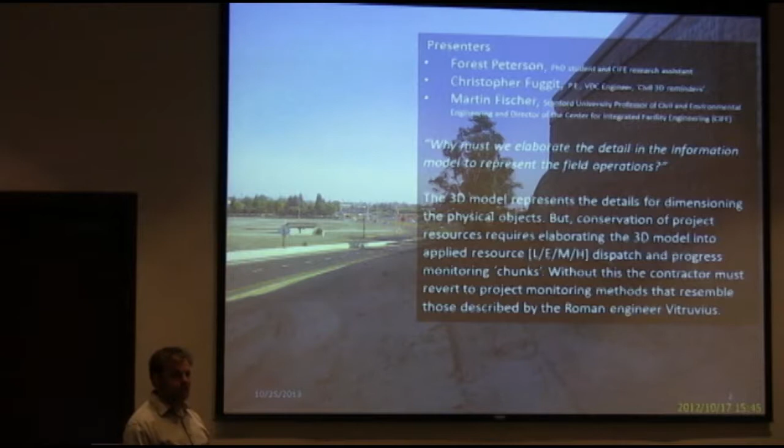From that point, when you go to the construction level, you need to elaborate the model to represent your applied resources—usually labor, equipment, material, haul. This allows you to dispatch and do progress monitoring in small chunks. Otherwise we'd have one line item for the whole project, and I'd say I'm 83% complete. You'd ask, how do you know? I'd say, that's just where we are. So we break it into small pieces and aggregate it up so we can come to an exact point of where we are in the project and what we need to do to finish.

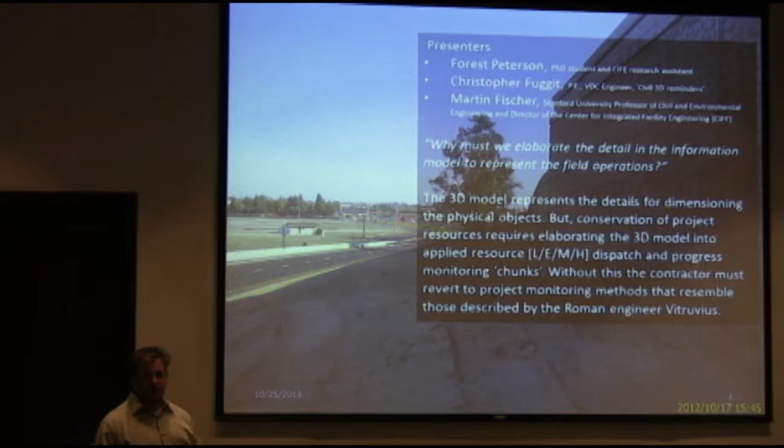Without that method of elaborating project detail... I read a book written by, I presume, a civil engineer named Vitruvius, a Roman engineer who built lots of great things, siege engines included. In his book he also had a chapter on project management, and I was amazed that the project management method he described was no different from the one I was taught to use. So elaboration is, I guess, a big step forward if you can apply it within the civil information modeling system.

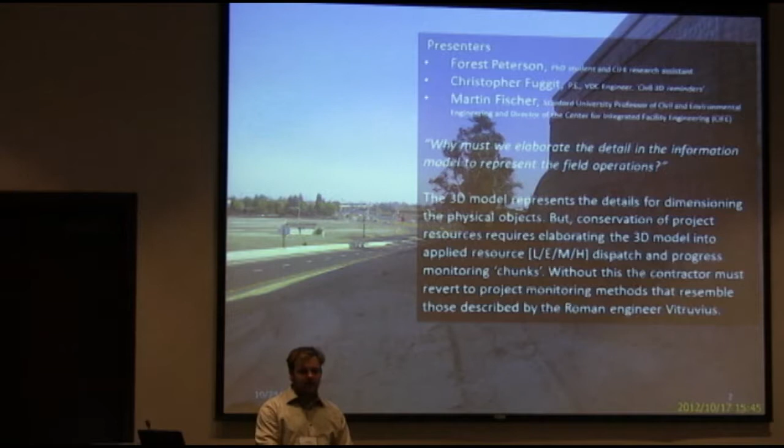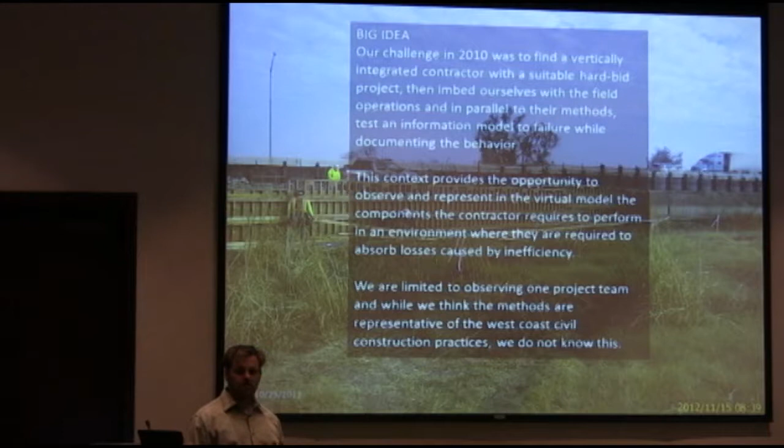So our big idea is: in 2010, we wanted to find a contractor who would allow us to embed ourselves with them. The big fancy word for it is ethnography. We went to live with the natives until we learned to eat their food, and they forgot we were somebody else, and then they just started letting us see everything, how they did it.

So we found a contractor, a vertically integrated contractor, meaning we don't have to deal with subcontractors. It's an all-in-one operation—they own everything from maybe the batch plant all the way down; they don't own the laborers, but basically they have the same guys working there for 20 years, and every project it's the same crew that goes everywhere.

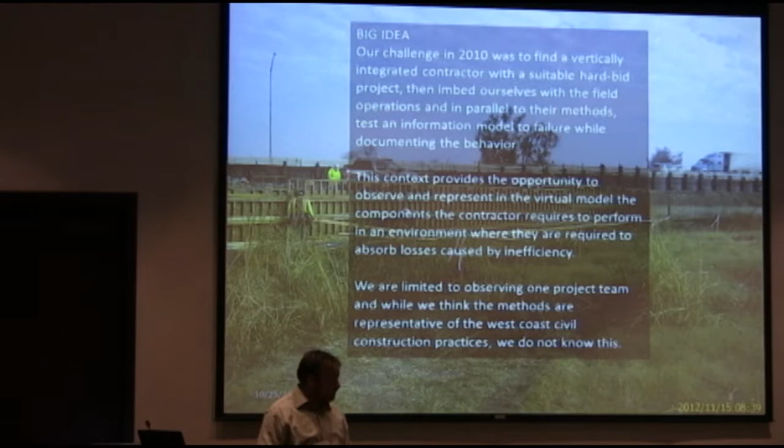And we're looking for these hard bid projects. Hard bid projects were important because we wanted to have an environment where the contractor was forced to eat their mistakes, and it makes them care a little bit more. We didn't want to be in an environment where something goes wrong and you simply negotiate your way out of it and ask for more money.

You know, we all know in highway construction it's not quite so rigid as hard as it seems, but still it's much different than, say, the building industry, where they can basically throw everything to the wind, build something without a schedule, and as things go wrong, well, things just didn't work out.

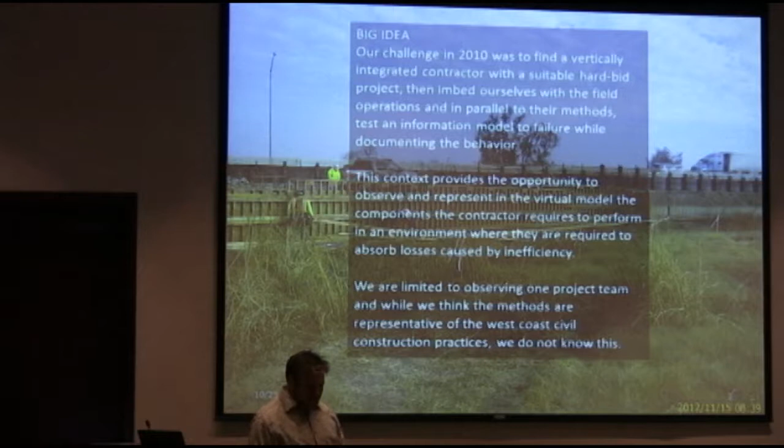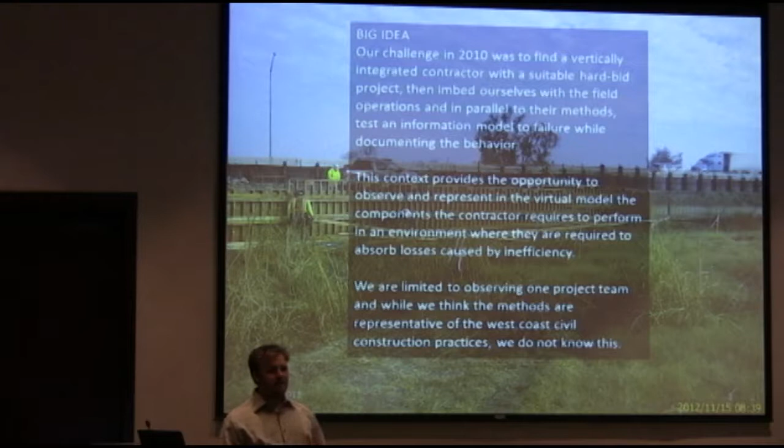And the last thing is just to keep this in perspective: we observed one project, so everything I'm showing you is just for this company in Caltrans District 10, in Merced. I can't say this applies to anything else in the world.

So there's my little disclaimer, but I'm pretty sure it does apply to everything else. So what we're going to talk about: first I'm going to go through what we call the VDC theory, just a refresher, so everybody knows the terms I use and how I think of VDC, since people have different ways of thinking about this. Then we're going to go through what we call action research, where we partnered up with a company, and they became our guide dog once we got out of the academic world and into the real world. We'd be a little clumsy and confused about what's going on, so they kind of showed us around. We had the host project. We'll talk about the VDC pit, a little bit about level of detail, which is elaboration, then the integrated model, and then some suggestions from what we saw, if we had continued this work.

When we started this, we thought things would have been much easier.

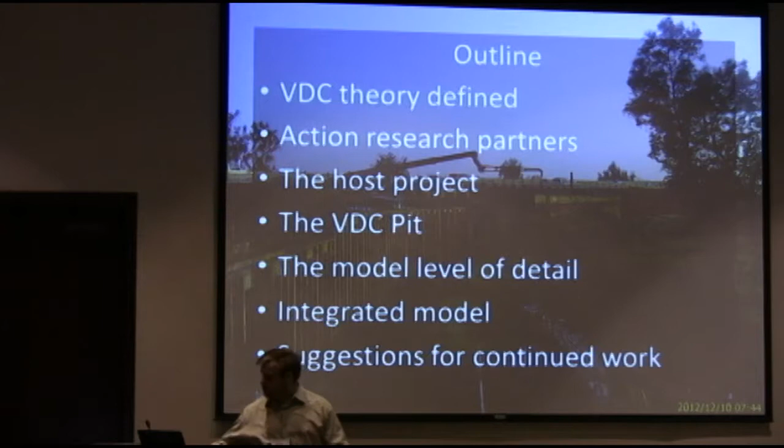So, some background. This is how I see the integrated model. It's basically a Venn diagram with the old project management triangle: scope, time, cost. So when it becomes integrated scope, time, cost, it started making sense to me, because scope is quantity takeoff or bill of materials, time is the schedule, cost is the estimate.

And I looked at, well, what is this in a pure sense? Like, if I just showed up to the project with time and did no project scope and had no cost, what is that? Well, that's MOB. Everybody loves mobilization, it's free money.

So scope, we have permanent, modified, temporary, and removed objects. Pretty much sums up all the categories on a project. And cost is... time is a milestone. Sorry, I got that backwards. Time is milestones. Cost is MOB with no time and scope. That was backwards.

And so where these cross over, you have scope, time, production. Well, that becomes a 4D model simulation. And when you have scope, cost, well, that's unit cost, that's your labor per hour. And time variable cost is usually like rental equipment, haul trucks or cranes and things like that. And where these all merge in the middle is the activity.

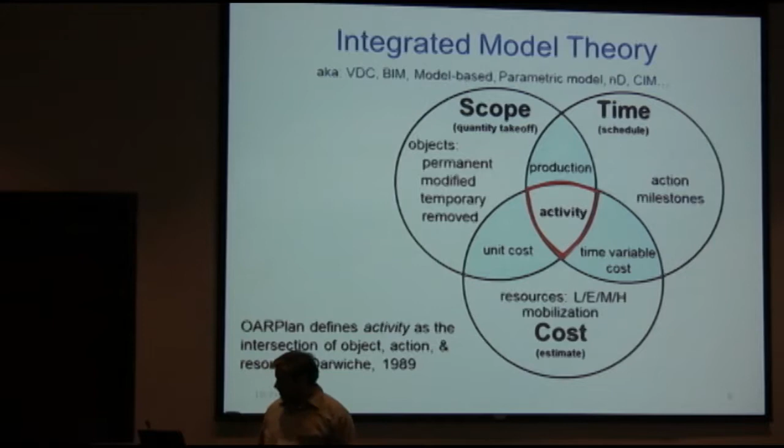So the contractors have to have a way of representing these items, and over the years, no one can tell me quite where these came from. These coding systems have developed. One said, well, we had a code for 10, 20, 30, 40, and that's what we used for our corporate accounting, for our reporting to the IRS or whatever, and the guys in the field tacked on some more levels. He said over the years, it just got longer and longer.

So these codes here, and to help everyone in the overhead here who's not actually on the project understand what they're looking at, it's just been something that's evolved.

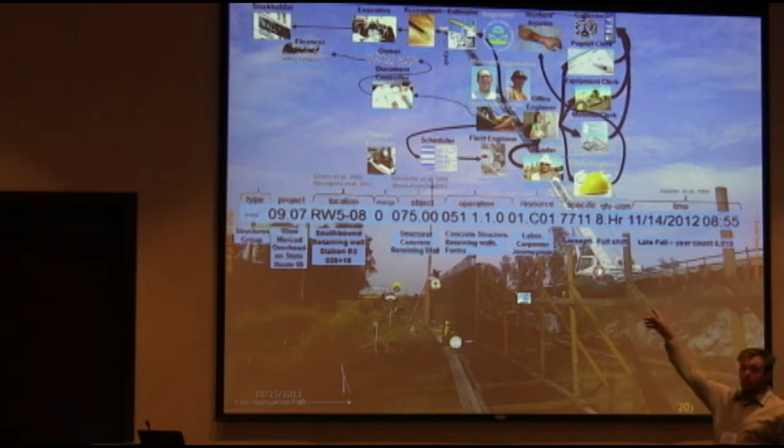And so if I look over here and it says, if I just tell you we have 8 hours, you go, 8 hours of what? And in this case here, you back up and that C01 tells me, well, that's a carpenter journeyman. If it goes C02, it would have been a carpenter apprentice.

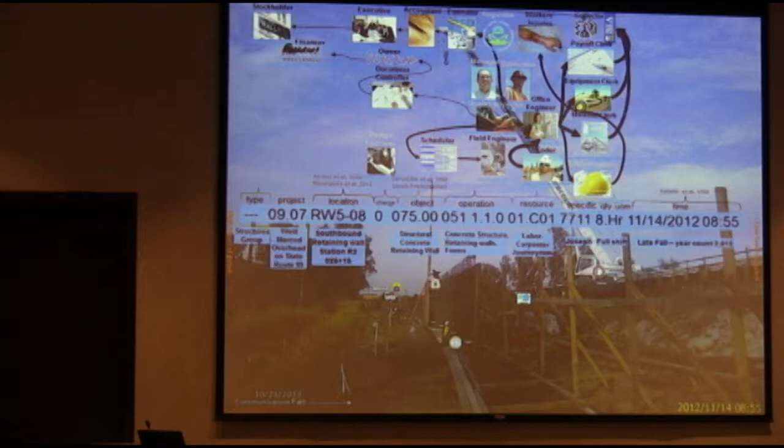So I know that this carpenter up here, he's C01. If I wasn't there and I didn't see this picture, and I just showed you that code, you're supposed to imagine all this happening. You can just see it. And if I show you this without the code, you should be thinking the code. So this is how we tie these things together.

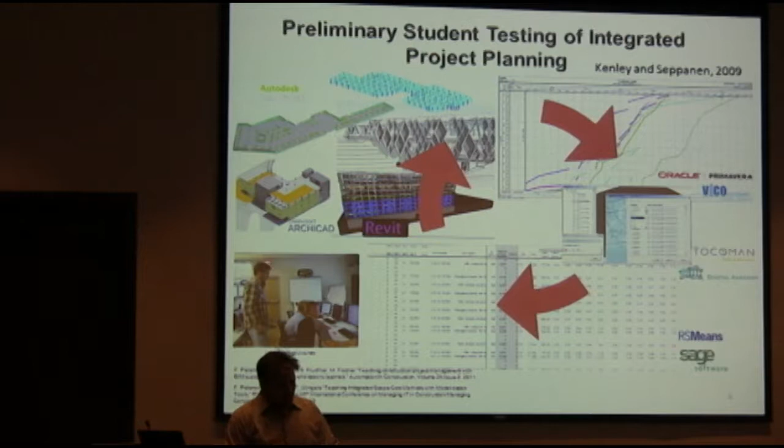In preparation of going out on the project, we tested this for several years with a large number of master students in, I think, 3 or 4 different classes. We wanted to see if this integration system worked. Of course, we were using the building system because it's a little bit further ahead.

So the line of balance schedule has all these funny wiggly lines, but it's basically like a production chart. You imagine the bottom is time, and on the vertical axis, that's location. So as you're moving through the locations of the project, you're running through time, and you can see the production rates, because if you're moving through the locations faster, the slope of your curve will be steeper.

So we then used middleware. There's lots of different types of middleware. This one was a company from Finland that built this really nice middleware package, and that allowed us to move our quantities into this VICO and out into, say, a spreadsheet or some other type of more advanced estimating software. In this case, we have Sage. It could have been MC squared or something.

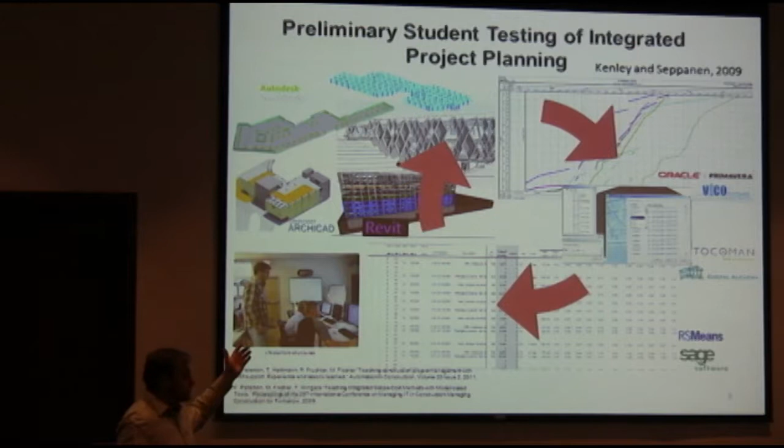And then from there, the students say, hey, that's not the cost we want. Some of these were integrated teams with an architect and a cost manager. They say, okay, well, we need to change this project to have lower costs, and everything. So all this worked fine. We published papers on it, and we were completely confident we were ready to take this out into a heavy construction project, and we're so confident we'll go to a project and actually implement this.

So we looked for a partner. Out in the construction project, the standard is once you have a baseline schedule, of course, in the first week of the project, the schedule is no longer any good. So you have a replanning method.

In the building industry, sometimes they try to have one schedule and hold everyone to it throughout. But in the heavy industry, I've noticed we usually just make a new schedule every month or every week, whatever's needed. So you have your scope that you're building, your production, your schedule, your field crews.

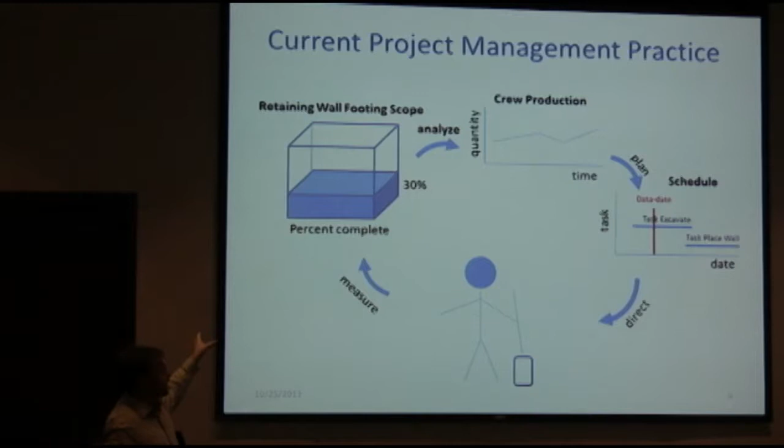So you go through, you analyze, create your production plan, direct the field crews to go do this, they do it, you measure what they did, you update your bill of materials with what's been completed. From that, you can figure out your production rates. Presumably, though no one actually does this, you then reforecast your schedule and redirect the field crews, completing the cycle.

Okay, so here's our action research partner. This is RGW Construction. They don't particularly understand what BIM is or any kind of modeling. They're the kind of guys who get their paper-based plans in PDF, take AGTEK, review it in AGTEK, and create in HeavyBid their estimate. That's just what they do.

But they've been participating in research for quite a few years with Professor Tatum. Professor Tatum has published numerous papers on this company, saying this is an innovative organization. If you want to try something new, this is the type of organization you need to go to.

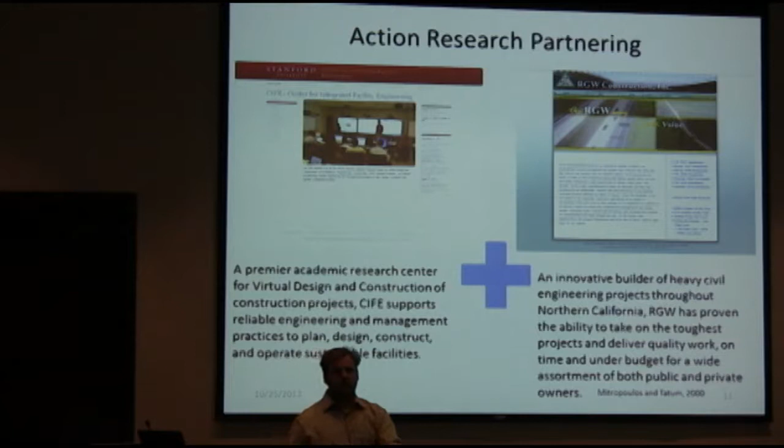They will be accepting. So we say, okay, let's go talk with RGW. RGW says, that sounds fine. We're happy to help you with your research. We can't put this out live on a project without it being tested. You know, they throttled us a little bit and said, let's do it in parallel. We'll do it our way. You can sit there and you do it your way, and we'll see how this does. So this is where we start from.

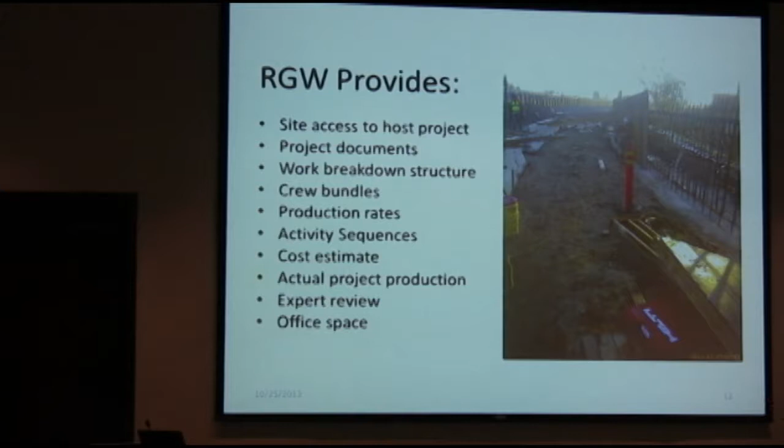So RGW, they give us site access, project documents, their work breakdown structure, another word for that big fancy coding system. They give us their crews, we get their production rates, their activity sequences, they give us the cost estimate, actual project production, their expert review, and of course office space on the project. So this was a very big deal for RGW. I mean, by the time we were done, the regional manager was sweating a little bit because he had just given me all of their company information they use for bidding. And so this was not easy to obtain from a company.

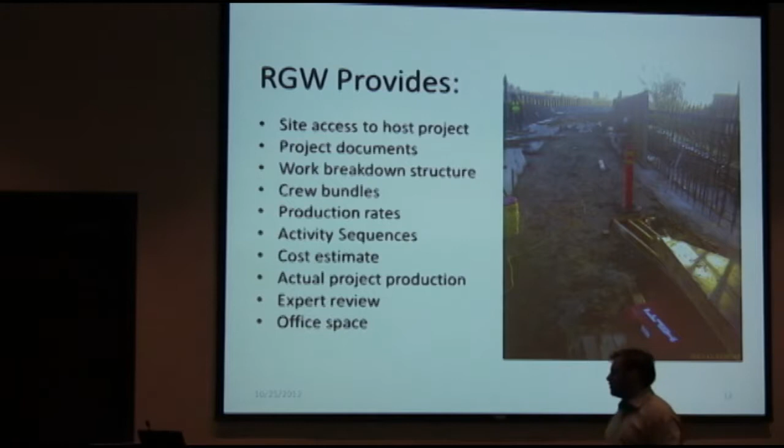And so CIFE, we're the partners, we provide a research assistant. We have software licenses from all our partner companies. And we have the university resources of computing and professors who we can go talk to when things don't work out.

So the project we went to is the Merced State Route 99. This is a District 10 project. It was a hard bid project. And it's a $34 million, somewhere I saw it had a 33% contingency in it. I'm not sure if that was true or not, but I suppose that means they planned on this being a fairly difficult project. I heard later on they were able to pull that money back out.

And this is, I guess this is being done for the high-speed rail, which is supposed to pass underneath this bridge, and you couldn't fit double tracks. And so they're doing sister and cousin projects of this all up and down 99. On the other side of Merced, you take this project, you flip it around, and it's the exact same project on the south side of town where the freeway crosses back over the tracks.

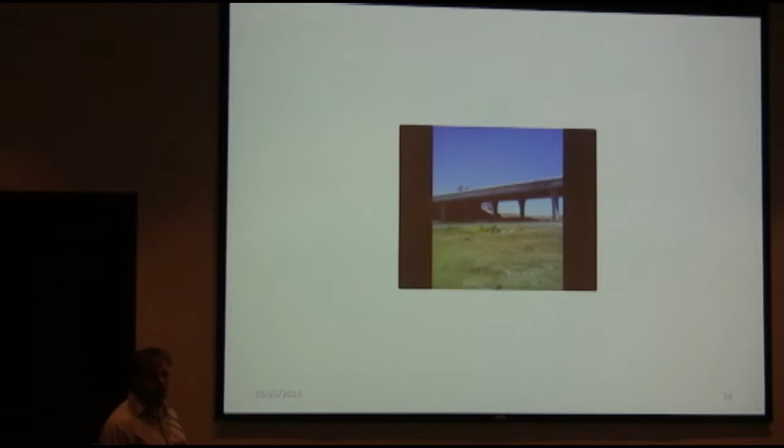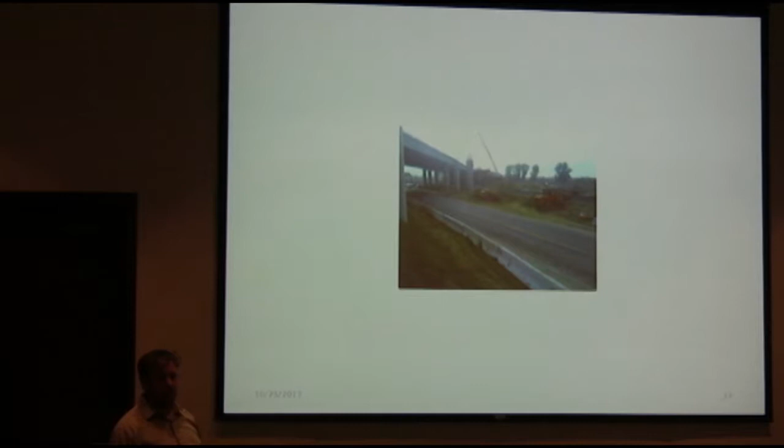So you get an idea of the project. This was just taken with a cell phone. General highway project. And this is after, this is phase 3. You can see the abutments there being excavated. And then same thing here. They have a loader, which is backfilling the footings for the bents. I thought it was interesting here that they were using a loader to backfill. You know, what's the cycle time on that? It was like 2 minutes. But for whatever reason, that morning, on that day, that was just the way that they were doing it.

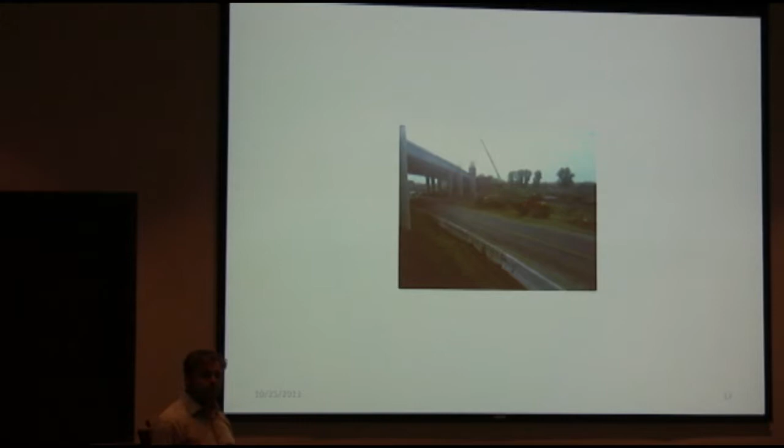So when we got to the office, the first thing was, okay, let's see how they're doing things right now, so we can have a kind of a scientific comparison. So this is what we found. They have the PDF plans printed out. They had the bridge deck, topography rolled out. I think there's a cost estimate somewhere, things on the wall, highlighters, a little calculator, triangular ruler.

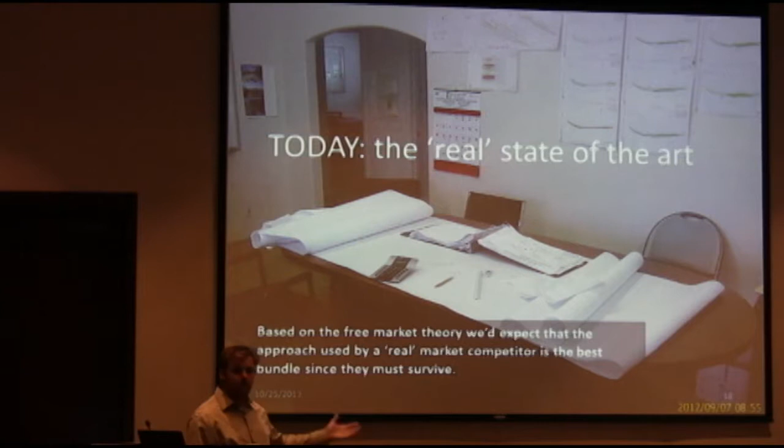You know, if I went back to Vitruvius in the Roman days, I might actually find these exact same items, with the exception of the calculator. You might have an abacus. I think they had paper and they drew in perspective back then. So based on the free market theory, you know, we all know this. Well, these guys are real.

I think the recent economic events. Somebody like Kiewit does it very well. Yes. But for their niche, these guys might be out of business next year, we don't know. But right now they're in business. So we went out in the field, and they have a gap.

We noticed that when we left the office with all the papers and we went out to the field, there's a very different world. If I ask anyone in the field, well, what about the plans? They say, well, they tell me what to do over the radio, their survey over here. There is a very definite gap between the project planning side of things and the field side of things. But these are the key players, these are people actually doing the work.

And I asked the carpenter foreman, he's doing his time cards, I asked him about these codes, and he's explaining these codes to me. He's getting on the radio, someone's telling him what code to use and where to put his hours. And he says, well, you think that I'm filling out all this information, that this is going into the loop where they replan what I'm going to do next week, and even more than that, this is going to go into the plan for the next project.

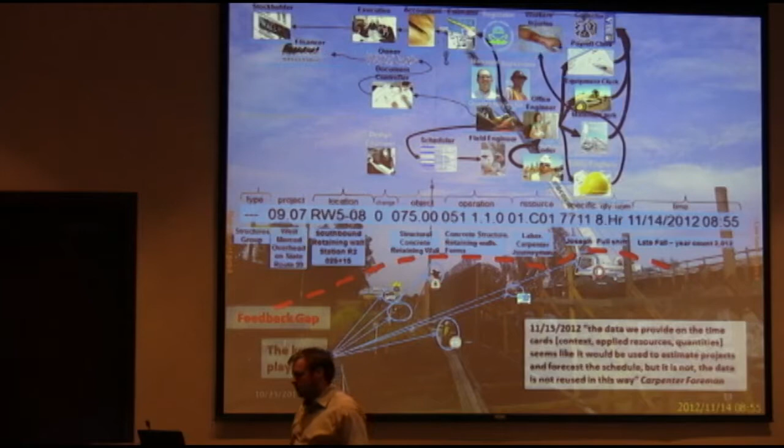But he says, I've been here for 30 years, and I know that's not what happens. This paper goes into a file cabinet, and nobody ever looks at it after they do the billings. And maybe the engineer crosses his desk and he uses it for the monthly billing. So there's this gap that we found. So next is what we brought to the project.

So this was our supercomputer. We built it for this project specifically, took all the most expensive components and brought them all together and tried to build a computer that was dedicated just to sim. And the last addition that allowed it to work was we added a 14-inch shop fan to it, because we found that if we cooled the computer enough, it finally started working. So we realized we're on the edge of the technology here. Today, presumably, the computers would work better.

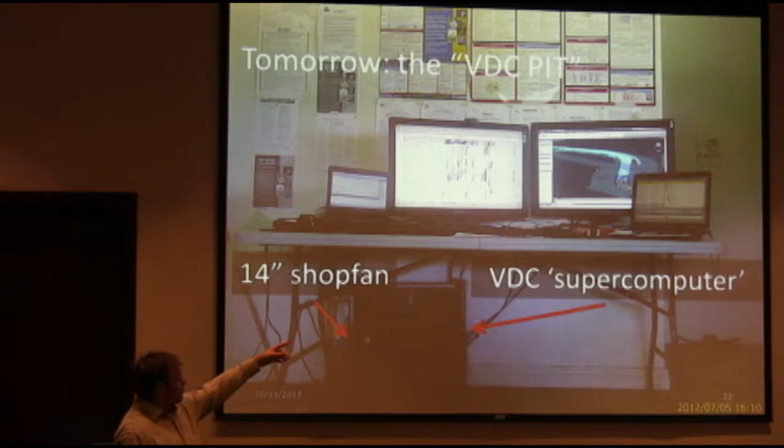And we have an old laptop that we run our older software on. We had a newer laptop just for screen space, and we had the big monitors here. Now we oversized the monitors because we wanted to use a grassroots approach here. We wanted to pull the contractor into what we were doing. And we wanted, as they were walking by, to see over our shoulders, what's this and what's that? So the monitors didn't need to be that big.

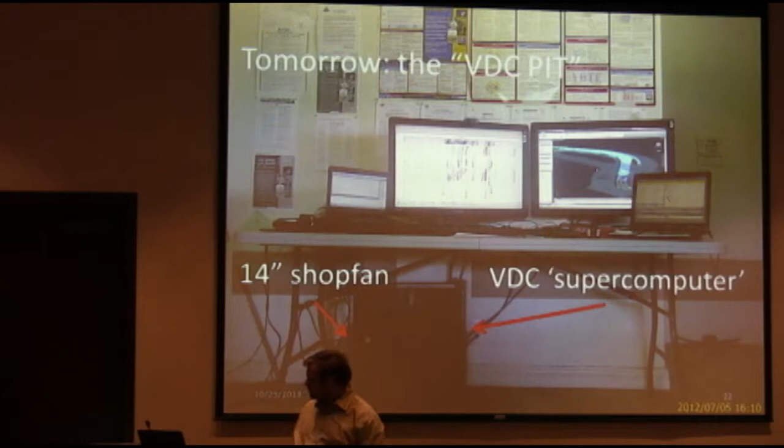And we did the site walk. We had a computer, we walked around the site, and we tried to bridge that gap a little bit, where we were bringing the plans out to the field. I could walk up to a superintendent and say, hey, look at this 4D simulation. Here's my schedule. Does this make sense?

And they would say, oh, no, that's not that way. We've changed the plan. Or they'd say, oh, that's interesting. We are bringing in 3 new crews next week. Or they'd say, I hadn't thought about it yet. This is Monday. That's next Monday.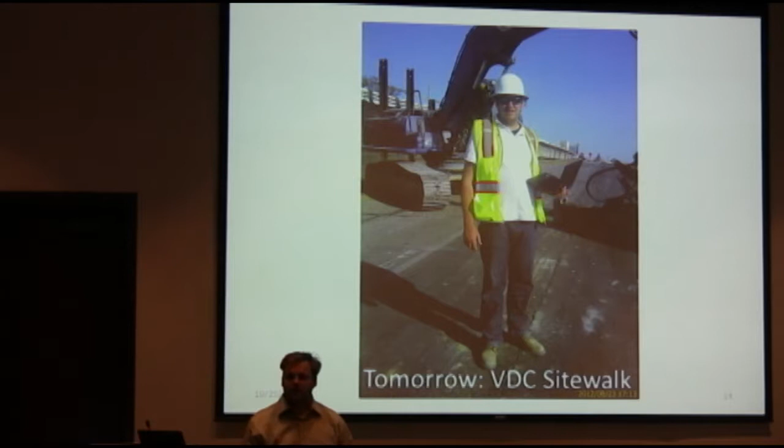So the model level of detail. Okay, so let's look at just the retaining wall on this project, and we'll forget everything else. So in my engineering courses, I learned that there's 3 main modes of failure for a retaining wall. You have the slope failure, the tip failure, and a sliding failure. And so as engineers, this is what we're taught.

This is a retaining wall. It's a solid block, and we treat it as a solid block. It's cantilevered. I push on the top, and I have a lever on the bottom that prevents it from tipping. I put a key on the bottom, it keeps it from sliding. I do soil analysis, soil stabilization, it keeps it from failing.

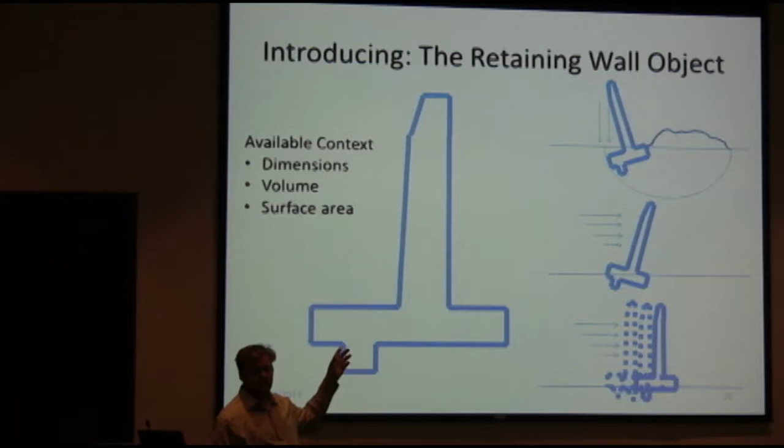But this is how the contractor looks at the retaining wall. So when we show up with software that looks at the wall as a single object, they look at the wall as, I don't have a count here, quite a few objects.

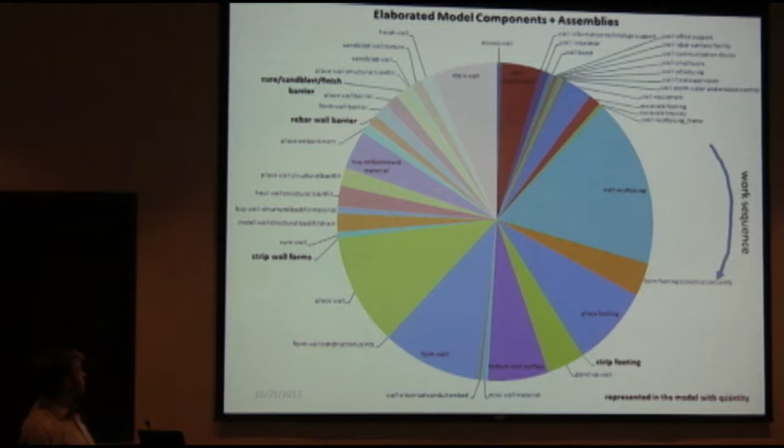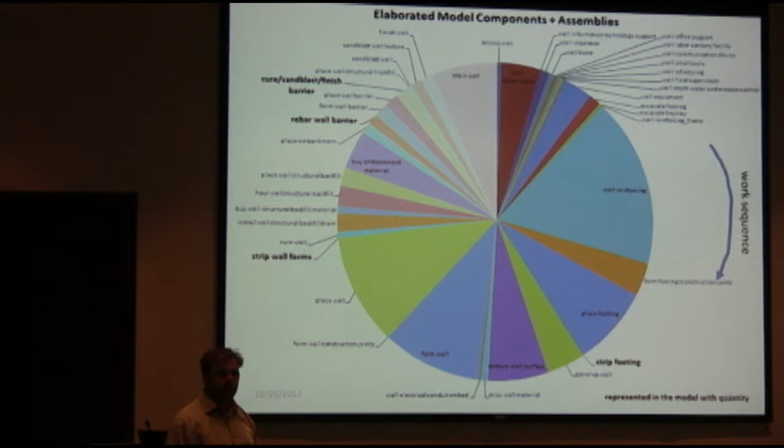So with this here, of course, we don't need all of this represented in the model. Some of these can be done with assemblies. We can reuse some quantities. You know, we don't necessarily need to have a quantity for texture wall separate from the quantity for stain the wall, because the textured wall is what stains, so it's repeated. So I'm going to run through now what each one of these look like.

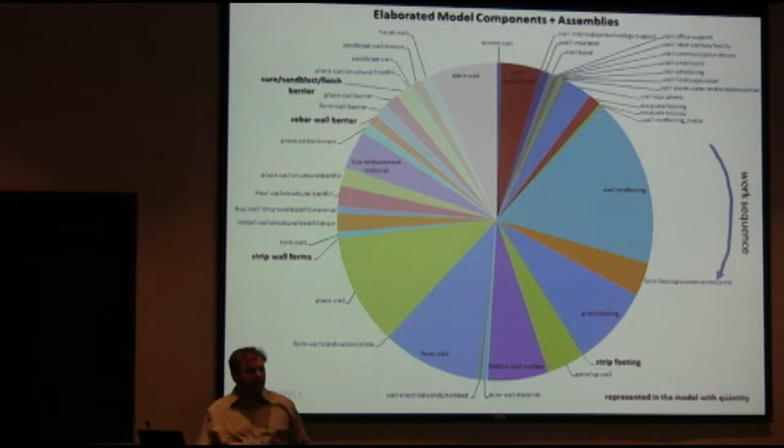So this is the excavate the footing and the keyway and build the rebar template. And then there's an access road. Now the access road isn't necessarily represented in the wall object, but I might want to have it represented just as an equation. When I put a wall object in there, it has an equation that represents that this percentage of the cost is for the wall.

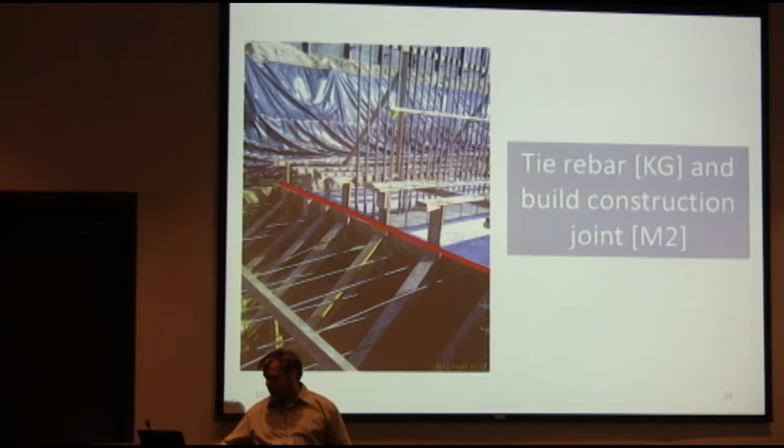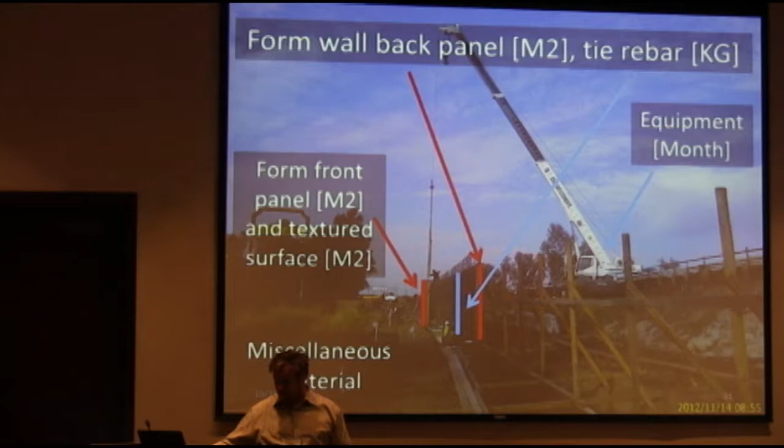We have the tie rebar and build the construction joint. We have the place footing, strip and cure, form wall back panel and tie the rebar, form the front panel and the texture surface and the miscellaneous material. And then we have the equipment, place wall concrete, strip, cure, sandblast, and patch, and sandblast to textured surface.

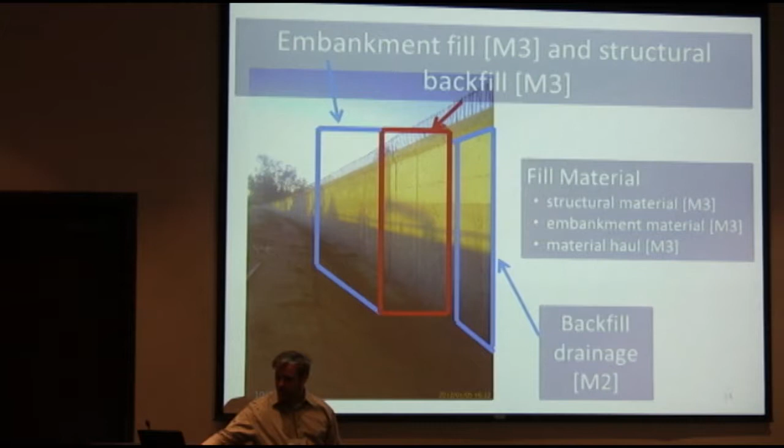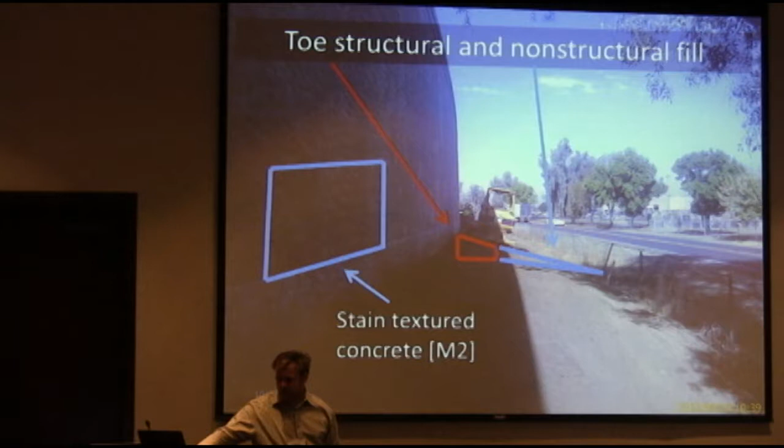We have embankment fill with structural fill and backfill. And then we also have the associated costs with purchasing the fill and hauling the fill. And then there's also the backfill drainage. We have the barrier rebar, the toe structural and non-structural fill, and staining the textured concrete. Form, place, strip, cure, sandblast, the barrier rail.

And then we have the wall overhead, which is assemblies within there. You know, some contractors know that supervision for a retaining wall type activity is going to be 5% of the total cost. And I saw one contractor had broken out all these different items, not every one of them, but they had percentages that they use in their estimate to put overhead on different items. And then they had the stormwater runoff and erosion control, and an electrical conduit happened to be in this wall.

So we needed a wall object in the sim that we were able to grab these quantities from, because our schedule is based on those quantities, the production rates we take from the field that the crews are turning in. We take last month's production to then forecast this month's production. So at this point, I'll turn it over to Christopher and let him go into details on the wall objects.

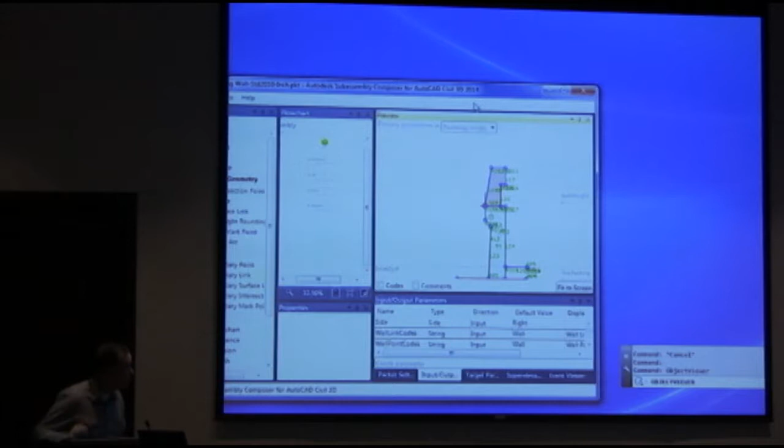All right, so one day out of the blue, I get a call from Forrest, didn't know beforehand, and he's asking me if I could do a retaining wall for him in Civil 3D. So if I open up Civil 3D, it's got some walls in here, somewhere down here. Basic data.

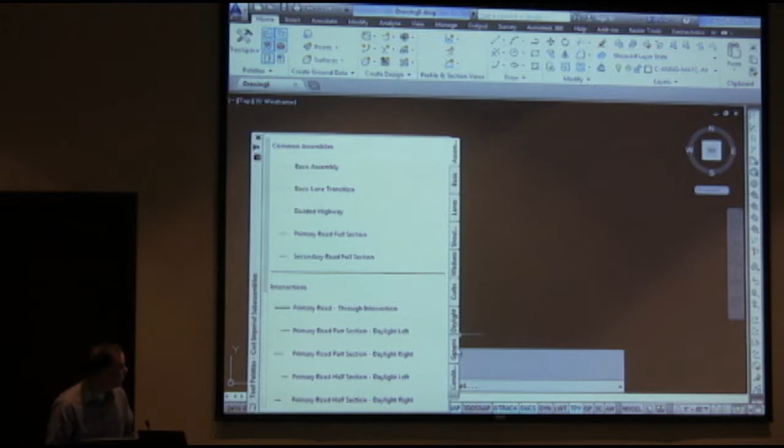Retaining walls. So it's got some retaining walls in here, but none of them are really suitable for construction. I wouldn't use them as construction, and I've done it before and tried to model it, and it doesn't work very well. So Forrest definitely needed some help if he was going to pull that information for those walls out into it. And so when he called me, Autodesk had recently introduced the Subassembly Composer, and so I was pretty sure I could revise it and give him something he could use to do that.

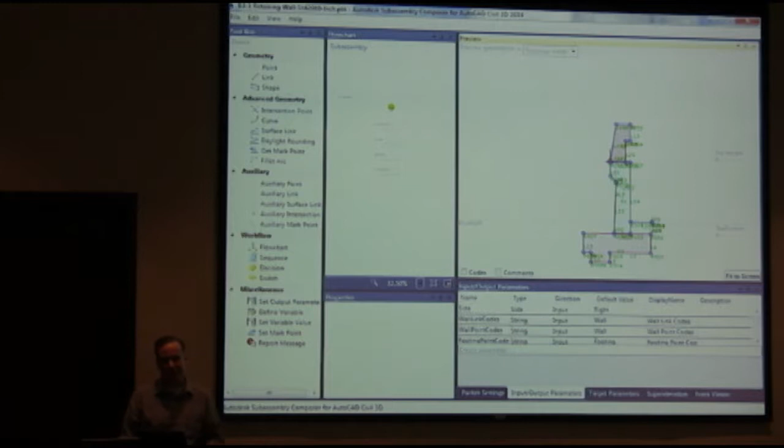And then I asked him how much money he had for it, and he told me he had $0 for me. So I had a decision to make. Do I do it for free, or do I try to barter something with him? And so I decided to barter with him, and so I traded my services to do this for a tour of Stanford University. So I did get something out of it. I just didn't get cold hard cash. And I actually had some time back there. It was around 2009. Economy was down. Not a lot of people were calling me. And so I had some time, so I figured I'd help them out.

And so I was able to break it up in Subassembly Composer. It's got pretty good tools to build the geometry using points, links, and shapes. And so I can build that wall that he needs and assign the codes to it.

So over here is the basic shape of the retaining wall. And so I was able to provide him a link point. So if the roadway is up on the left-hand side, he could use it for this side. And he could come down here and change the attachment point from right to left. I believe if I change it to the other side, it updates it, and now the tie points go the opposite way.

And he's also able to turn on and off the barrier up on top. I change that, the top of the barrier goes away for the roadway, and so he's able to customize it and actually get the thing he wants.

So before Subassembly Composer, it was a really long, drawn-out process, creating your own custom subassemblies. You had to go in .NET and code it, and it took probably about 3 times as long to code something like this in .NET using Visual Studio than it does to use Subassembly Composer. So for this one, it probably took me about 16 hours to put everything together. There was some learning time in that because Subassembly Composer at the time was new. So I could probably do this in like 12 hours now.

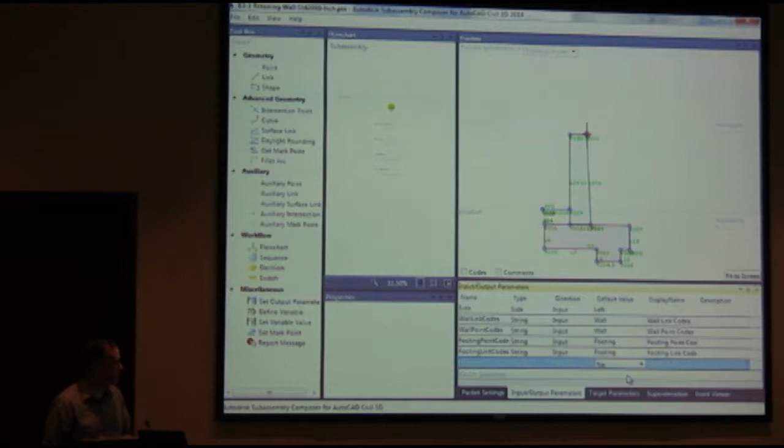So I'm able to set targets, and the targets can move. And so if I turn existing surface, it'll update, and so now my daylight for the top of the wall adjusts to it. So we could either put it in as a profile or just use a target for a surface. And so he's able to build his model using the actual values shown on the plans. So here I have the top of footing profile that you could set and get the actual location where it should be based on the plans.

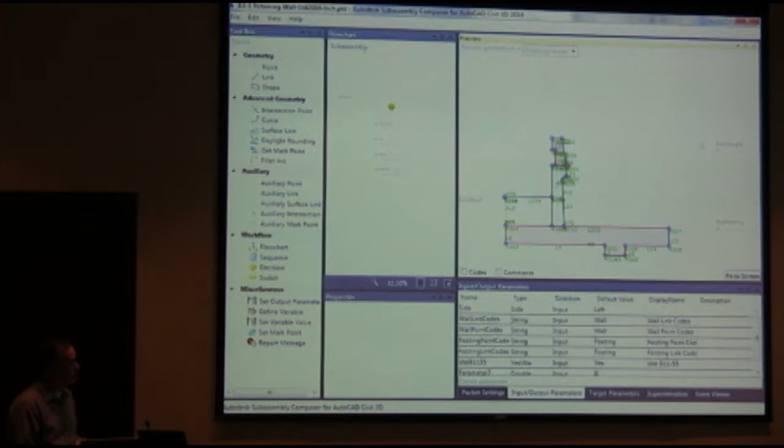And then you could also do the top of wall profile as well, and move it up. And so if we look at the standard plan, dimensions change based on the height of the wall. So as I adjusted the top of wall higher, the bottom of my footing got bigger. And so I was able to help him process this information based on the height, so he doesn't need to think about what the height is. It'll automatically do the footing for him, which is good and bad.

So it's good that I've automated the process, but it's bad because Caltrans's engineers or a consultant to Caltrans who did this really doesn't have those tools available to them, potentially. And so they've gone through and they've set their profile and their wall height, but my wall height may not actually match what he has.

So it's just something that you need to look at to make sure that if you're going to model it in Subassembly Composer and set your heights, that you double check that that's what the designer actually wanted, and that they are actually using the standard plans, because sometimes the time crunch happens and we forget to go back and change that footing and width later on. And so our plans might not reflect the actual design requirements based on just the standard plan.

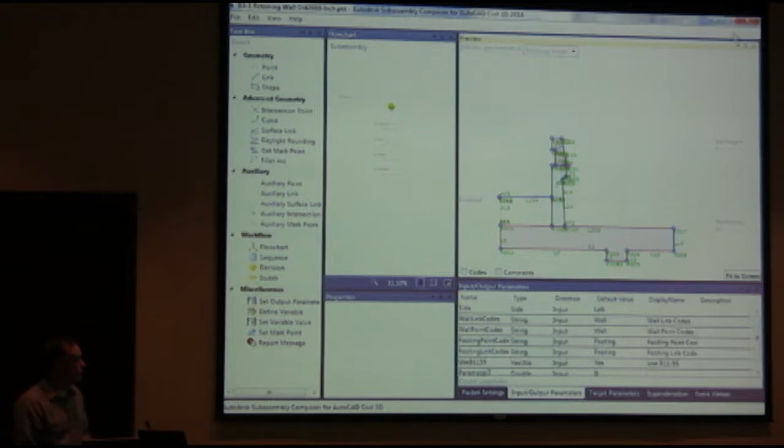So I created that for him, and then from that, he was able to create a 3D model, and that's one of his models. So this is the daylight line as the profile goes up. So it looks like the designer could have cut some wall height off there. If they were using 3D, they'd have been able to recognize that and adjust it and get a little more economical design.

If you look at it, one thing I don't like about Civil 3D and using corridors for design for walls, and I can't really find a good angle for this, is that the steps aren't nice and clean, so I'm not really getting great quantities out of it. Or if I do want great quantities off it to get that nice vertical face, I'm spending a lot of time trying to figure it out and put those in there.

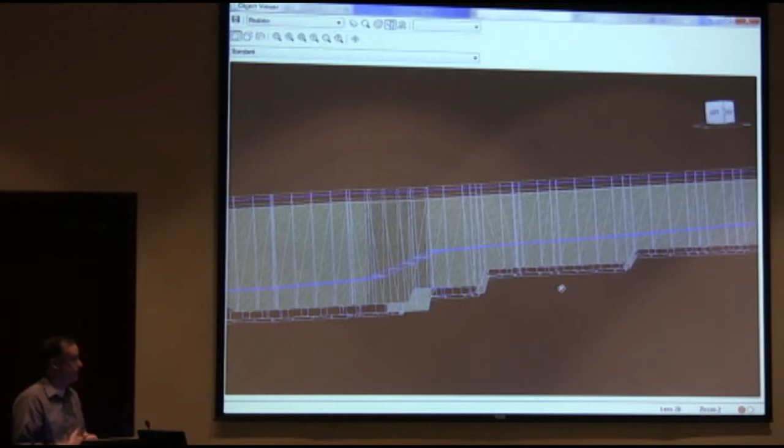Then we get down to, is it really worth that effort and time? And a lot of times it isn't. So, really, the contractor could have built it without this 3D model, which they probably did anyway. And so, that's it. I got the barrier on top, and then you can see the footing adjust and the steps and stuff. But you got a nice visual cue, a visual picture of it, and plus you're able to get the quantities from it.

Are you using a target profile for the bottom of the wall? Yes. And then the top of the profile, then I'm taking the math, subtracting, and then getting the footing width based on the Caltrans standard plan. But if you use the standard out of the box ones in Civil 3D, they don't really work very well. I'm not quite sure what world they live in, but it's not one that...

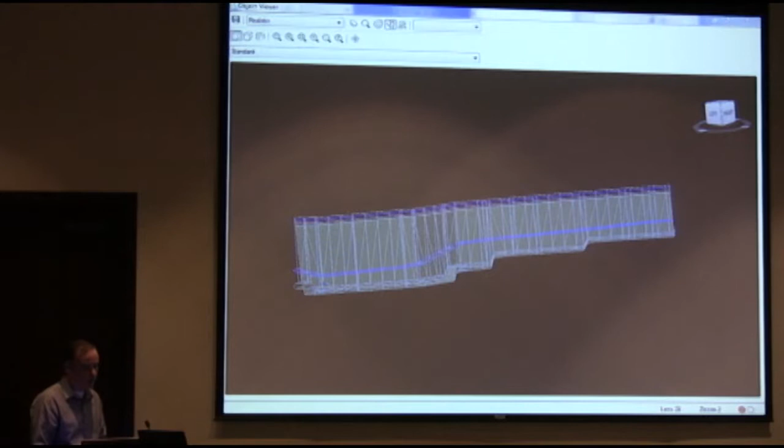But there was some additional information that I probably wanted to show on the wall. But like I said, I was doing it for free. And so I actually got busy doing something other than this project. And so if I was doing it as paid work, I probably would have gone in and created the extra links so you could do the quantities for the backfill, the wall backfill, the gravel that goes there, the pipe,

put in some daylights over here so it extends out from the bottom of the footing and goes up 2-to-1 or 1-to-1 to the daylights. So there's a lot of improvements that I could have done to get better accuracy. Add an option for maybe that access road that Forrest was talking about in his image. And I think that's all I have to talk about.

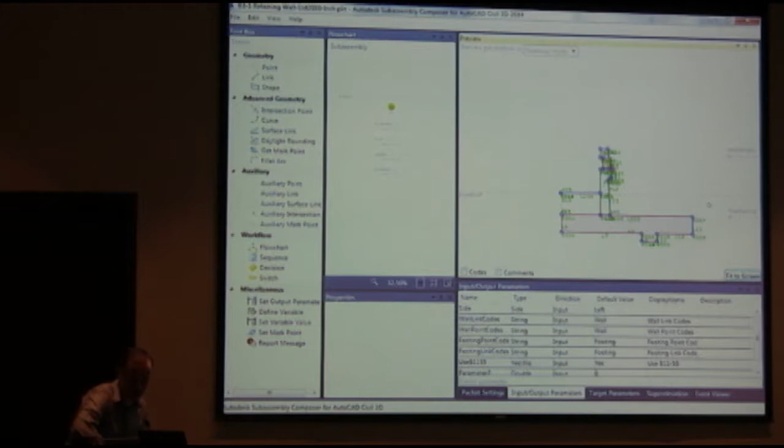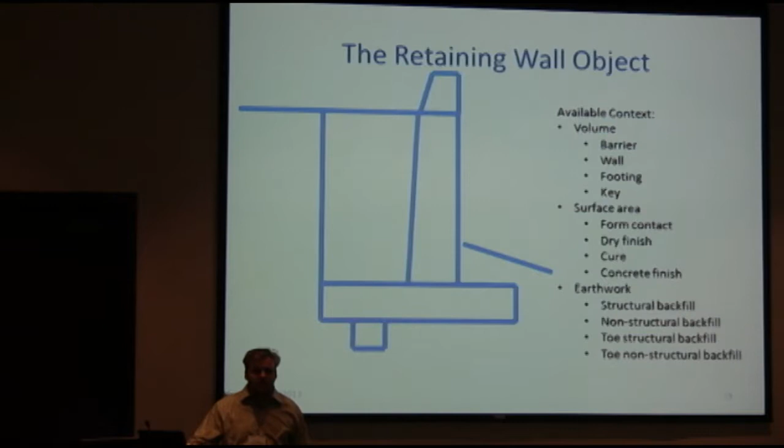So without that object, the experiment was done. We would pack up and go home. There was nothing more to do because we couldn't represent the retaining walls. Maybe I could have drawn a line and just done an average massing per foot or something like that, but it was impossible to model. So these are the standards that were embodied in the wall.

And so when we put it all together, these are these beautiful walls that as the walls curve along the roadway and change elevation, the footings change, the earthworks that go along with it are all put out there. And for what we were doing at this early stage in SIM, the quantities were just incredibly accurate. And so we were able to have very good numbers that we then rolled into the schedule with the quantities and with the contractor's production rates and their expected crewing and scheduling.

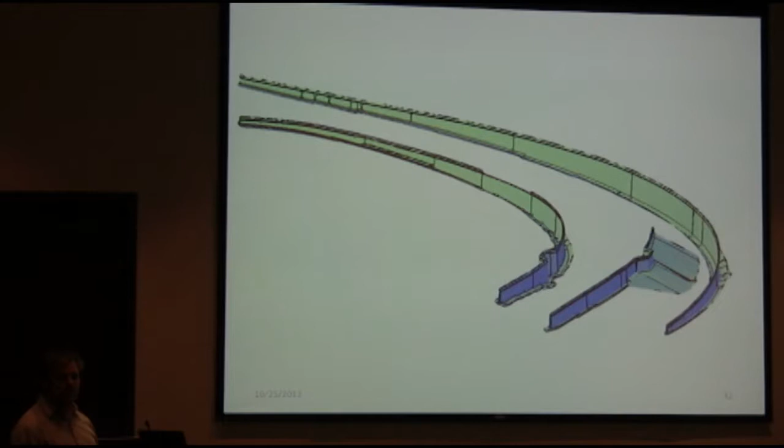We were able to build a schedule that was within plus or minus 3 days of what they actually did, which for scheduling, that's astronomical. But we could not have done it without this. Thanks, Chris.

So we built a 4D simulation. So we do a visual check. I don't know if anyone's going to see the mistake that's in this 4D simulation. So Carl, the superintendent, wanted trees in there, so we put trees. If you look closely, there's some birds in there. Bill, the project manager, wanted to see ducks. And Teddy, the foreman, he wanted to see hawks in the tree, because he said there's hawks nesting in the tree and we're doing construction around it. So I put a hawk in there.

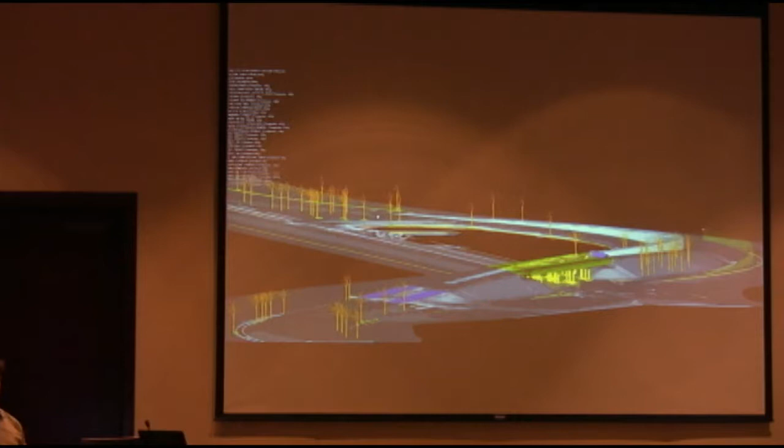And in retrospect, you can see the hawk over there on the right side, just at the tip of the wall. That hawk is incredibly important, and I should have probably put that hawk with its own schedule for the nesting season. So when the hawk's nesting, the hawk appears. Same with the ducks. And when they're not there, forget them.

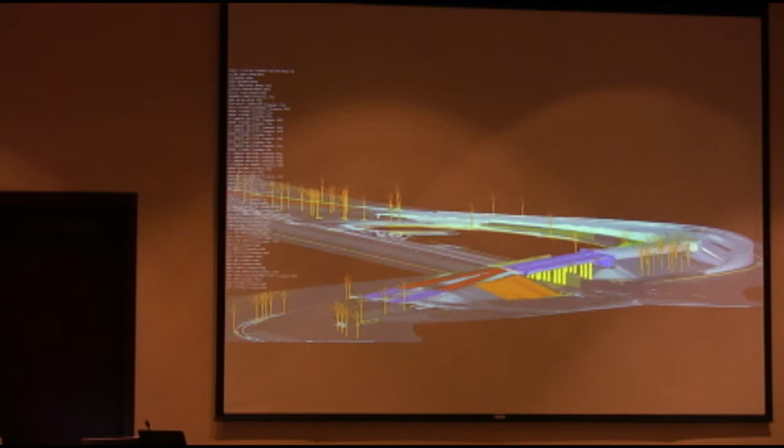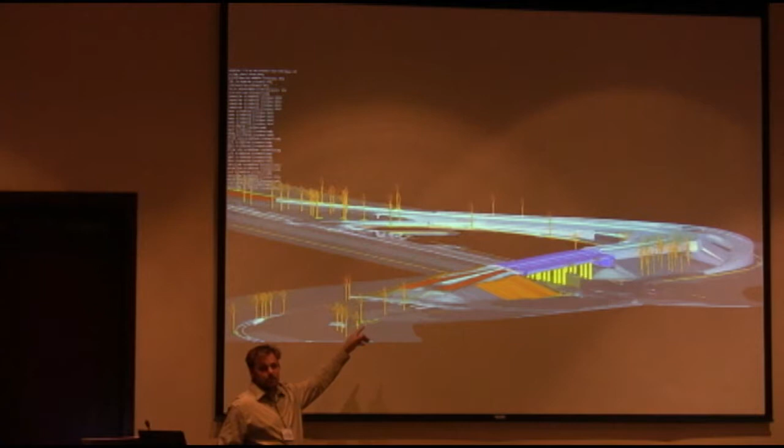We can build. But right now, where that wall's going in, that could be the nesting season, and we can't work. And it turns out these bridges over here, when I left the project, they still hadn't started on these. These things had slid like 6 months on the schedule because there's swallows underneath them. And when there weren't swallows underneath, there was water over there. And they just couldn't figure out when to do that work.

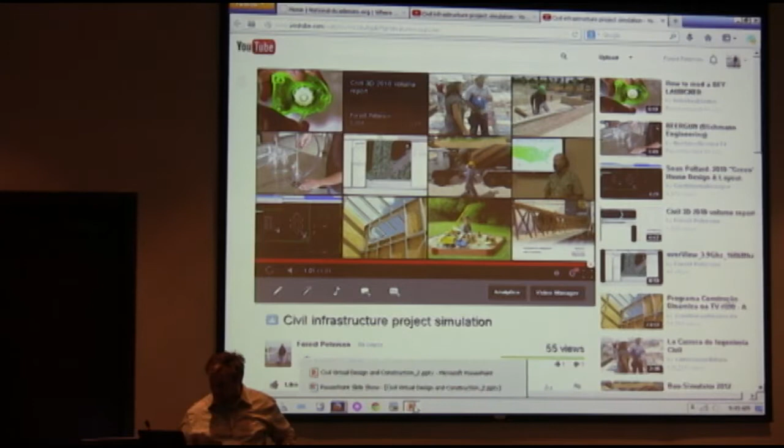I've noticed other modelers that I've seen back at the university doing some interesting stuff. One modeled a hurricane season in Puerto Rico. And there's a professor in the Netherlands, Professor Timo Hartmann, who has written a paper on putting those icons in there. That becomes an important visual tool to see some of these softer constraints on the project - the ones that if you violate will really mess up your project.

So when we compared our model to the contractor, when we looked at our 3D model to their 2D plan, we found that 5% of the objects in the drawings had no activities in the contractor's schedule. Some of it was simple stuff, temporary drainage, the gore in the middle of the road, but it came out to be 5% that just wasn't in the schedule. They were just going to do it whatever.

33% of the activities had no objects in the 3D model, which means those are assembly items or somehow these are activities that have no object representation - maybe like build the access road, they don't model it. And 15% of the resources that we saw were needed were not in the budget. So does that mean this project was 15% in the hole from day one?

So when we went out there, we were testing this, and we wanted to test it to failure and find out how far can we push the system.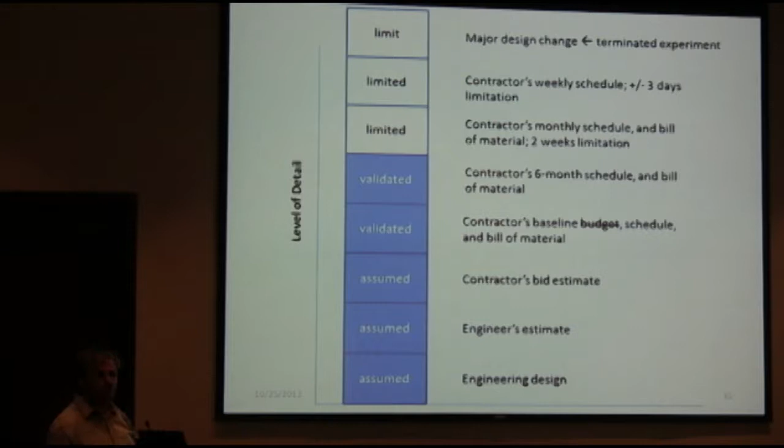It worked good up to about the 6-month revisions, but the monthly schedule, it couldn't keep up the pace. It took too long to change everything and bring the model back up.

So we continued for our own work, and we were looking at the weekly schedule because I wanted to be able to say, when I get a time card and I look at my schedule, I want that time card to match the schedule, and I shouldn't get any time cards that aren't scheduled - if I do, there's something wrong. So we got this down to plus or minus 3 days, and at that point, there was no way of really checking it closer than that.

And so then we took it a little further, and they had a major design change. They decided that the vehicle pullouts on that project were too small - there was no way to drive out of the ramp. They redesigned the retaining wall, and at that point, there was no way to rebuild the model. We had used text files - we could have just inputted the numbers, but it took so much work to redo everything that at that point, it was done. We couldn't do a major design change.

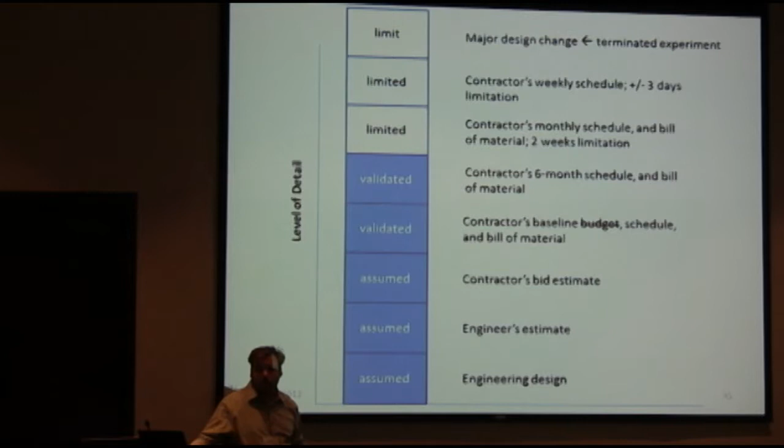And we found that that was the breaking point for the software, which I would think is fairly good. That's a fairly high bar to pass.

Now, of course, if we had done a double blind test, and just handed this off and taught an engineer to go do this, say we took 12 projects and had some grads, students, bachelors coming right out of Chico State, University of Oklahoma, Clemson, and had them do this on the project, I don't know if they would still achieve the same level. Maybe they would get better. But this is what we found.

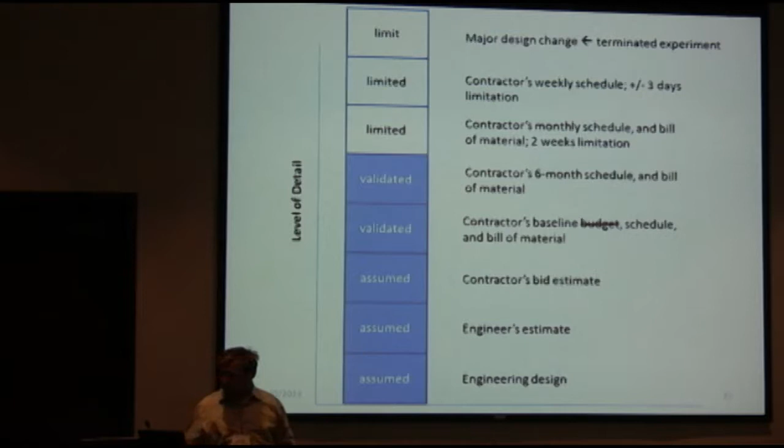So how long did this all take? We were there for 2 years doing this, and we recorded 2,000 hours of work. So this is my invoice, my time sheet.

We have a breakdown here. We spent quite a bit of time learning on this. We estimated that if we had done this 6 times, through learning we could probably pull this 2,000 hours down to about 300 hours. We could punch one of these out, and with some modifications to the software, maybe get it down to 150 hours. Then with a couple people on it, you're talking about a week's worth of work. But that's just an estimate.

But here's what we actually did, this was the time breakdown. We have preparation, learning, hardware setup, and we spent quite a bit of time on hardware. Then integration, a little bit of time on planning our CAD - maybe if we'd spent a little more time on that and less on other things we would have done better. The base surface and alignment was pretty quick.

Doing our profiles and our sections, this is about where Christopher came in and we needed help there. Then we built our corridors, surfaces, solid objects for the bridges and the abutments, the bents, and all the custom massings.

We built locations into the model, meaning we took what usually is a model with one location - this one here is corridors - and split the corridors into 28 corridors, then multiplied that by 3 corridors wide, just because of the way the software is set up. So we ended up with something like 90 corridors, which then sent us back to hardware again.

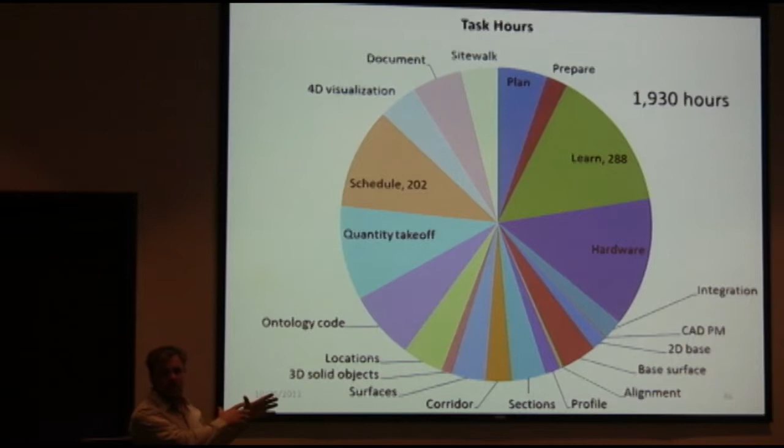Because we were there in the office the whole time, I'd show up at 7 a.m. when the guys opened the door, they'd let me in, and I was there till 4 o'clock. If they let me stay, I was there till midnight. And they were able to watch all 2,000 of these hours the entire time. Believe me, they felt that was much too long. But that's what it was.

So, some challenges. First, we weren't able to fully validate that this VDC closes the gap, though we were able to cross the gap with the field using our handheld devices.

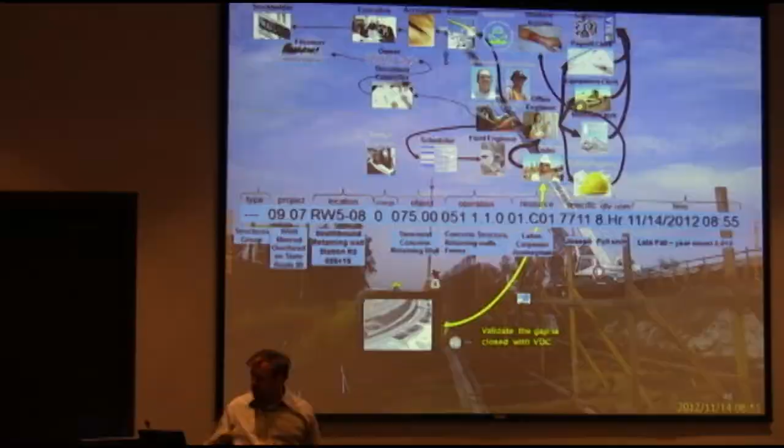In a perfect world, the contractor would have bought us all iPads to give out to the superintendents, who would have been looking at our model, updating it, doing their time cards with the model. But after 2,000 hours, they were not interested in that, and there was no point in going any further. But I think everyone here agrees this is definitely the future - bringing the model out into the field, closing the loop right now by showing the guys in the field what we're going to do.

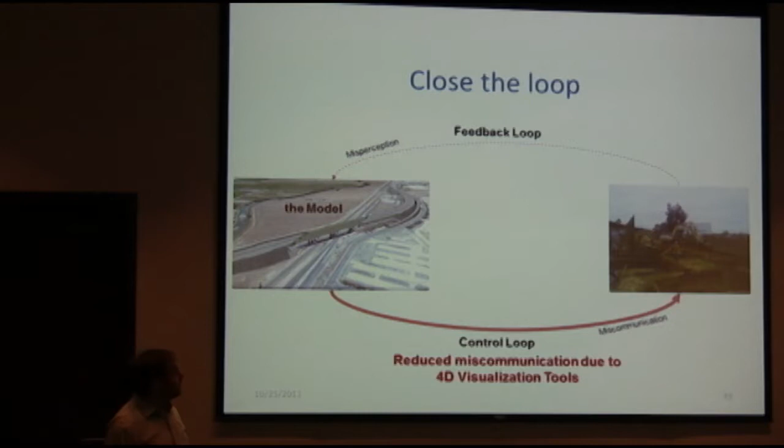When I showed them that 4D model, I remember the guys in the field saying, wow, I didn't know we were building that retaining wall way over there. We've done a quarter mile of it, we thought we were done. But no, it's almost a mile-long retaining wall. The feedback loop of how do we represent what's actually happened out in the field and get it back into the model, we haven't found a solution for that.

That's 100%. It would have been nice to have gone that far, but the technology and where we are today just didn't support that last step. But we got the feed-forward loop and a little bit of the feedback.

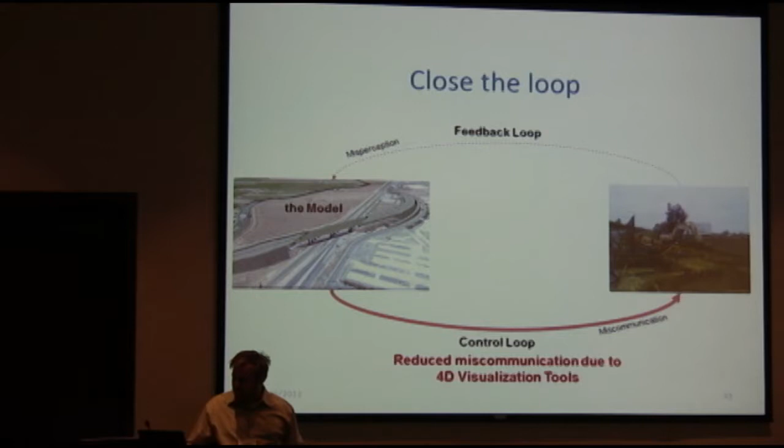So for future work, the biggest stumbling block to me was that core spine of that representation. So that I know that this item in the schedule is this item in the model, which is this item in the cost estimate, which is this item that I'm looking at out in the field. And I need a way of representing those and matching them one-to-one.

But just by nature, those items aren't at the same level of detail. They have to be elaborated. The schedule is abstracted from the 3D model, and the estimate is way more detailed than the 3D model. So I need a way to elaborate across levels of detail, and there's no easy way to do that. I haven't picked up any paper that explains to me a theory of how to do that.

There's lots of practices out there, and I can figure it out on my own, but if I try to teach somebody else that, I might as well teach them how to do art and paint a picture. So if somebody could figure that out and create a standard that all the software vendors use, how do you elaborate across a level of detail? And then, of course, putting that standard into library objects so that the objects are able to elaborate themselves.

So I can have the retaining wall object for my engineering analysis, I can have it for my abstract bid estimate, and I can use that object all the way down to the contractor's project monitoring.

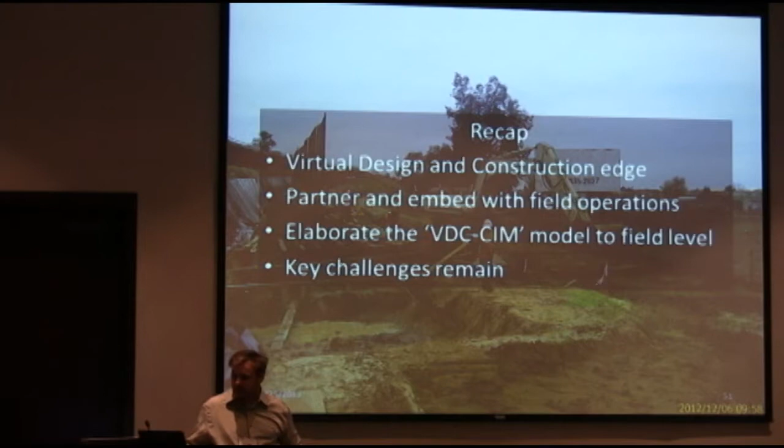To recap, we talked about virtual design and construction at the edge, which is the perimeter of the organization where the rubber meets the road. We talked about partnering and embedding with the field operations, and we elaborated the VDC-CIM model to the field level. We see that there's some key challenges that still remain. And so with that, thank you for your time. I'll be happy to talk with you guys about what you think.

I think the most important thing you discussed today was this concept of embedding, which coincidentally is what we were discussing last night over a reasonable quantity of beer. A lot of us in this room. So what I've seen, you know, I'm a practitioner, but through the TRB...

What they're calling research in NCHRP is somebody gets some research, and then somebody gets it, and they do a document search of academic papers that were obsolete by the time they were written. Half of the stuff they're citing is their own past work, and they put together a questionnaire which they send out, which everybody lies on, including myself, and they produce a report which isn't even close to reality.

So I think what you're talking about as embedment is actually more important than the information that you presented today. What's important is how it's collected, which I think is far better science and far better research than document searches and questionnaires. Yes, I agree.

I can't take credit for any of that. Kevin's not here from PB, but Kevin worked with Timo Hartmann on the project. It was a PB underground subway project in New York City. I'm not sure what it's called, but that is where Timo developed this idea of embedment, and that you have to go out and you have to go to the field.

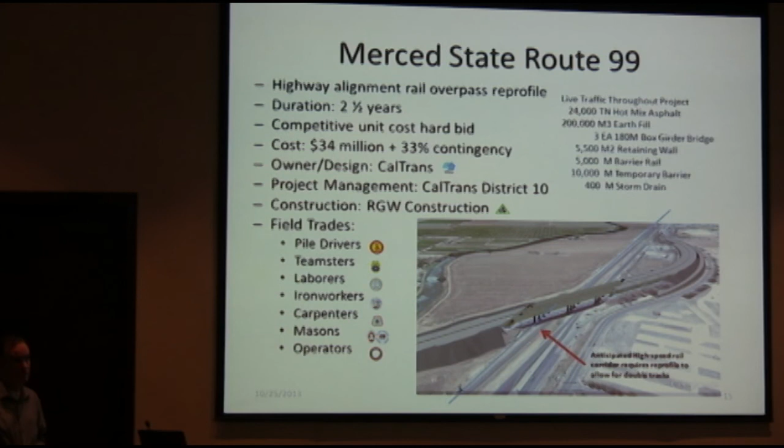And so I could have told them, and that would have been a return on investment. There you go. Long before: you guys either need to increase your false work guys, which they couldn't because they had constrained workspace, or they need to cut their bottom deck crew in half, they had 2 crews running, or maybe they do that for safety, or they need to just have them go home for a while and do something else. But there was no exercise, even informally, to try to identify, at least, this would have been the economic benefit of X, Y, or Z.

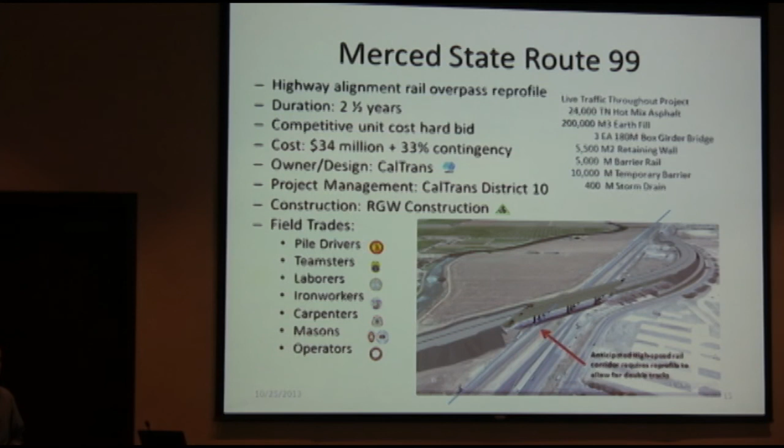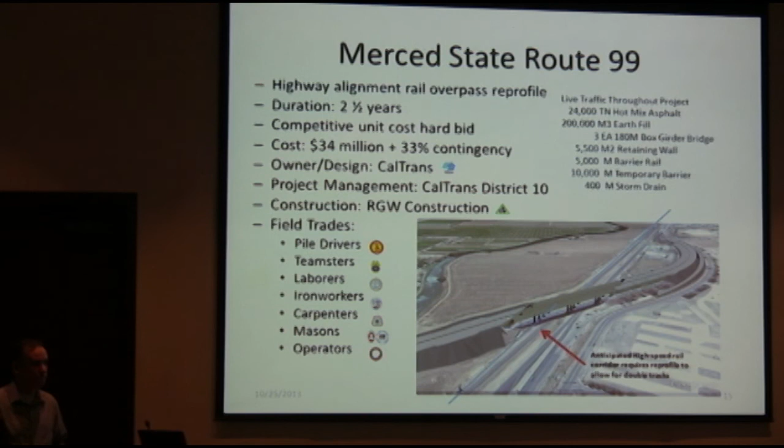Yeah, we can't put a value on it. It'd be pretty wide. It would be a guess. Yeah. And only if they were conducive. Just because you observe something wrong doesn't mean they'll accept it. Yeah. You pointed it out. No, nobody will accept that false work. I've shown that to other people, and they go, "Oh, these guys are screwed up. Or these guys didn't know what they were doing. A real contractor would have done that the correct way." But I'm like, I think these guys are as real as they get. It was real.